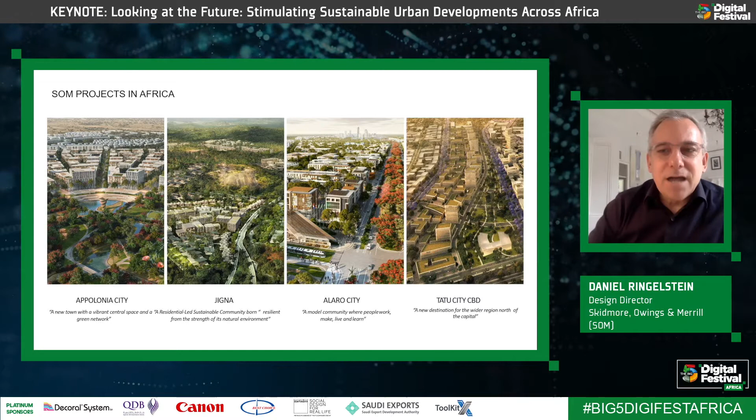Just to give you a sense of scale, these are all potentially greenfield projects on the outskirts of these cities, about 800 to 1,000 hectares in size — similar to, if you know, central London, the city of London, the square mile, as it's known.

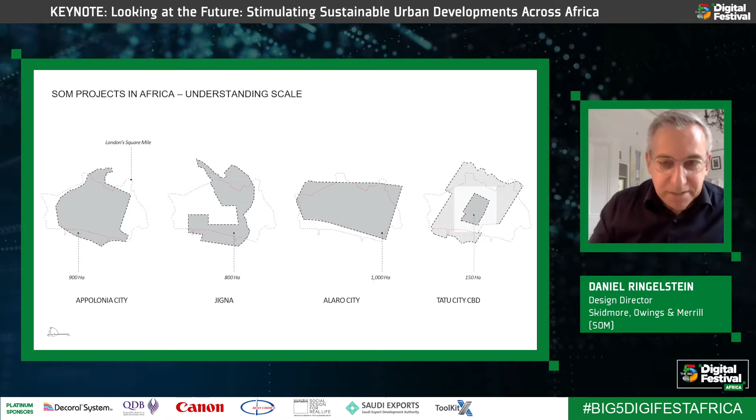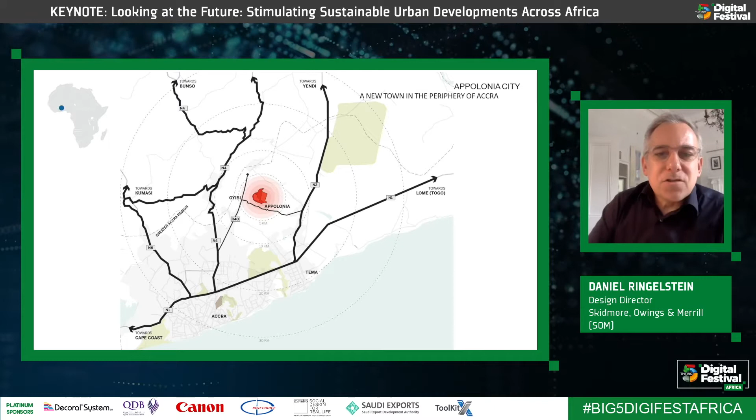The first project here is in Ghana, on the outskirts of the city. Again, a new community, primarily housing with a mixed-use core and also some light industrial land located to the north of Accra, on the outskirts of the city.

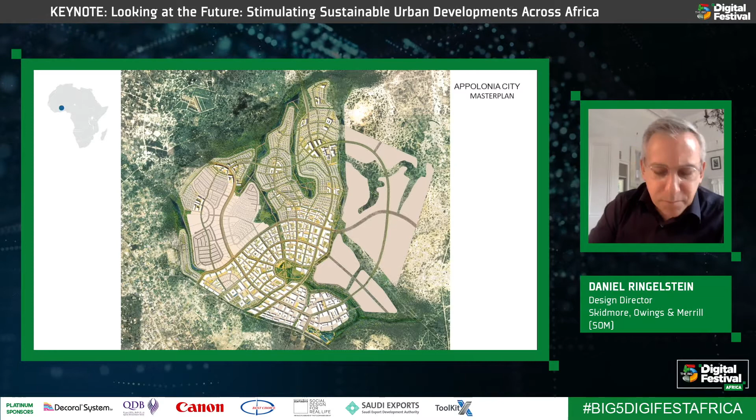As in most of these projects, we are engaging with a very interesting natural rural landscape in many cases, so we try to be shepherds of the local site and understand the natural systems that can help frame our projects. These really end up shaping the plan from a 2-dimensional point of view, but also understanding how the landscape can be harnessed to create value in a more 3-dimensional way, creating places for people to come together.

We're using these greenway corridors not only to manage water, but also to create linear park spaces that bring people together in these new places. We have to create a 'there,' particularly in these out-of-city-center projects, so we use these green spaces as a way to build community.

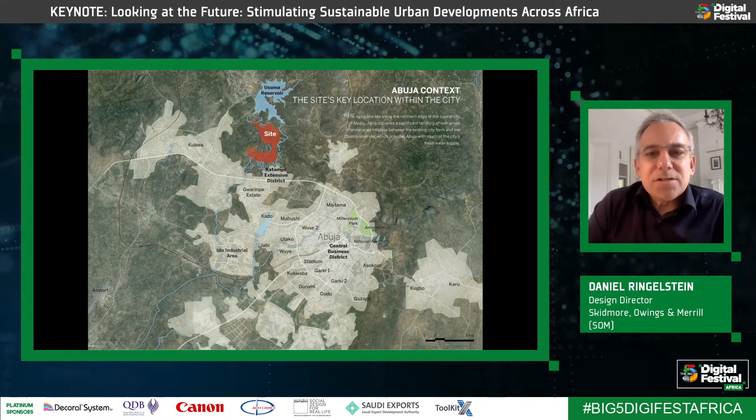The second project is in Abuja, the capital city of Nigeria, again outside the city center in a much more sensitive landscape environment. This is an expansion of the city to the north, and a pretty amazing site that's really within the foothills — not of the mountains, but with incredible topography surrounding the site.

This site is really one of tremendous environmental interest, with granite domes created in prehistoric times that are revealed to us, tremendous valleys and natural landscapes. Some of this land is being grazed with pastures, but most of it is native, untouched land.

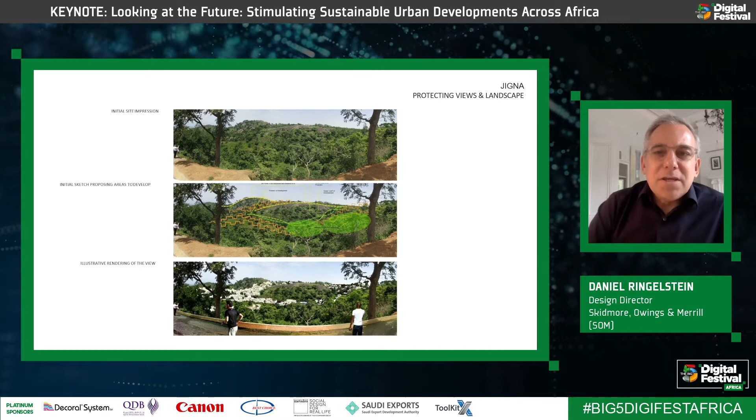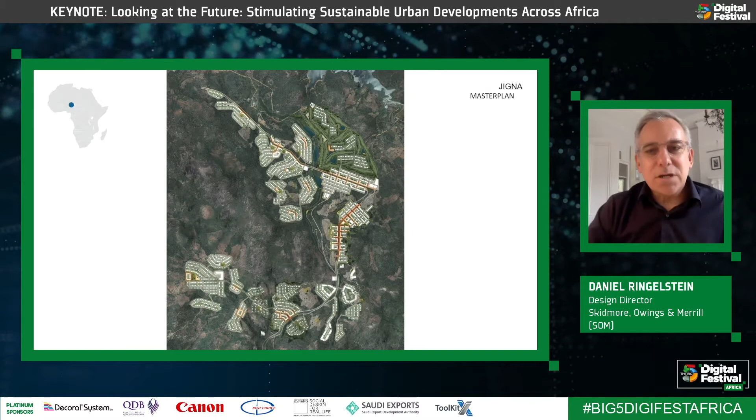In this case, we really wanted to plan in a very sensitive way, from a bottom-up point of view — asking where you would want to find development within these incredible valleys and peaks, rather than a top-down approach. So the plan isn't really a formal top-down idea at all; it's the result of working with the land to understand appropriate places to build, and where not to build.

And this is the result: a series of communities that find their way to coalesce within little neighborhoods around the city center. Each one has a direct connection with the natural landscape and the water courses that flow through it, and we try to make sure we're protecting these ecosystems.

Even when we design an individual neighborhood, we work with the topography — whether cross slopes or longitudinal slopes — to find streets and neighborhood spaces that necklace themselves into this very intriguing natural environment.

The third project is called Alaro City, again in Nigeria, on the outskirts of Lagos. This project really helps support the future growth of Lagos, which is expanding tremendously as the major cosmopolitan city of the country on the coast.

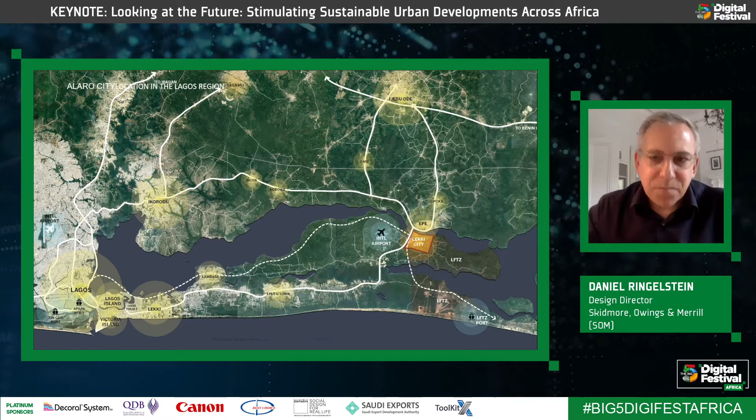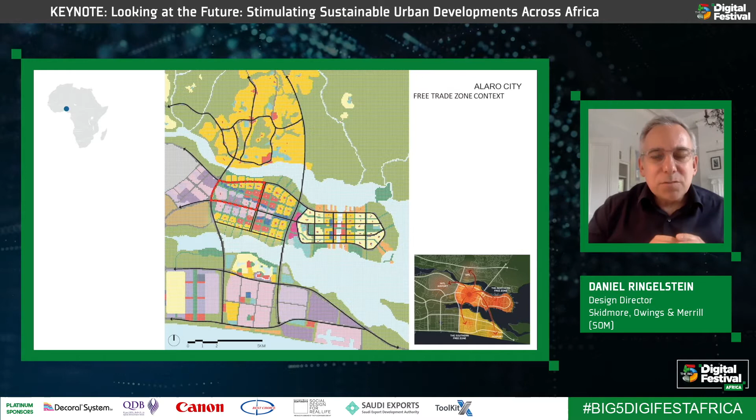And our project really we see as this new city center. So our project is the boundary shown in red here on the left. But we wanted to also make sure before we began to master plan this, have a wider vision for the wider area, which really had not yet been developed at any rigor.

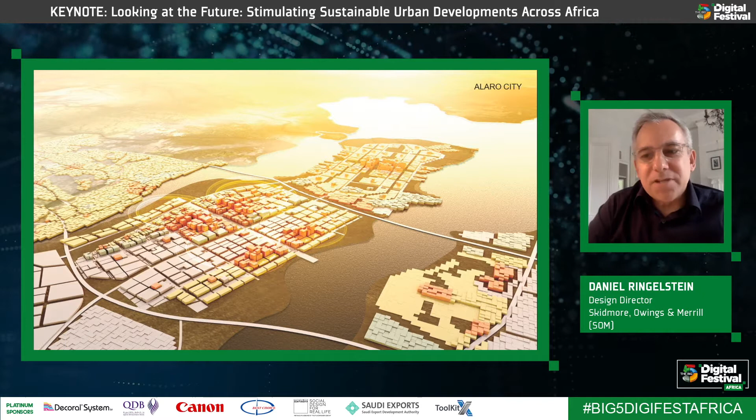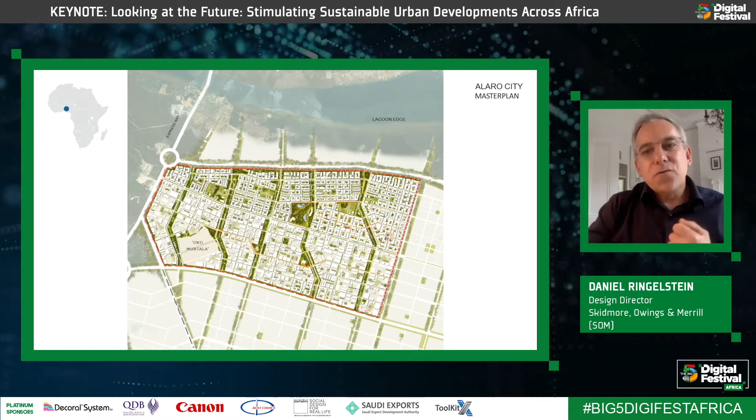So we were able to talk with the city government to understand the potential to build up a piece of a much larger plan that's coordinated at a larger scale. Again, here we have very sensitive natural environments, in this case, very low-lying flat land with potential for risk of sea level rise and flooding. So the natural courses of the green spaces that were there today really drove through and sort of broke apart the simple grid of the city that we developed here.

Again, the basic economic driver of this project is the industrial zone. So we were also thinking about what is the future of contemporary modern industry to also create local jobs. Obviously some of it's sort of harder space, industrial space, but also some of it is going to be in the future cleaner industrial space where the making of things is done in a much quieter and much more conducive environment for people.

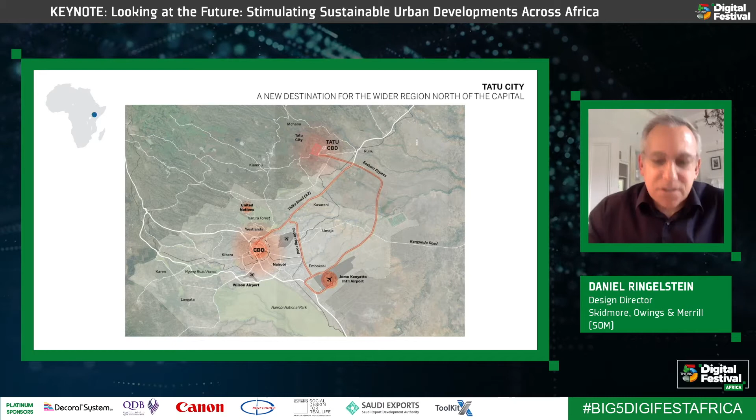And the fourth project we've been working on is in Nairobi, called Tatu City, located to the north of the city center. Again, this is more in an affluent area, but again on the outskirts of urbanization. It was a former coffee plantation, so there are obviously man-made interventions that happened here, but there's still a lot of tremendous assets in terms of the natural landscape to plan the city around.

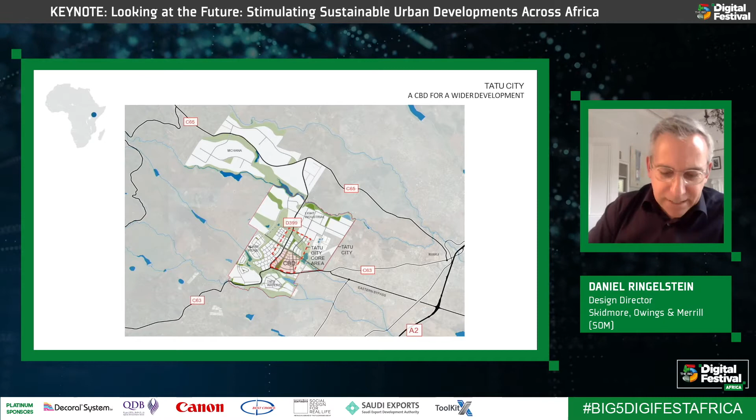So this project is now up to 2,000 hectares, and we were planning the central CBD, and we've also been looking at some of the neighborhoods around the CBD. This project was really focusing on how to deliver a mixed-use core over the long term that could be a bit more dense to provide really a new civic center for this part of greater Nairobi.

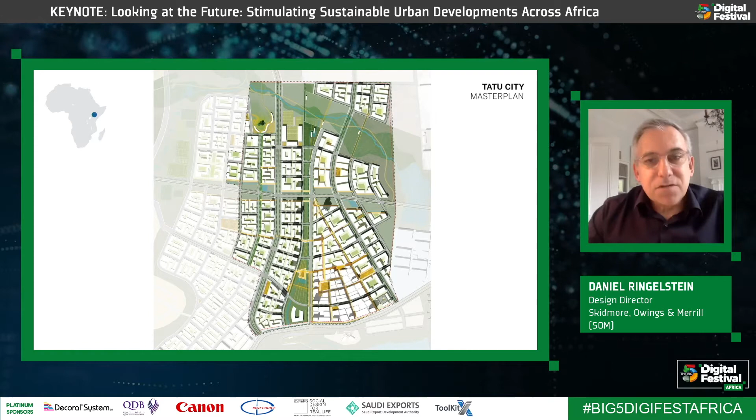And again, I'll focus on natural open space, but also this core of the city which had an intensive retail program. We wanted to make it feel much more outdoor and engaging in this incredible climate. It has the same climate profile as Santa Monica, California, in terms of access to sun and cool breezes.

So we tried to embrace that to form a new model of retail, and also find elements of the landscape which are pretty phenomenal in terms of this, for example, a mugumo tree, which is a ceremonial tree, incredible scale and size, to make that a feature in one of the neighborhood parks.

So really that's just an overview of the projects. Now I'll just go through some of the common themes that drive our work across all these projects.

Obviously, Sub-Saharan Africa, like many emerging markets around the world, has a lot of issues to deal with. Previous to working in Africa, we were doing a lot of work in Southeast Asia, and it's quite uncanny how those challenges are parallel. It's really about infrastructure, how to deal with rapid urbanization, what is appropriate density, how to provide a wide range of affordable housing, how to deal with climate change, and in this case, a heck of a lot of stormwater that's coming onto these sites, but also really building community, addressing the very colorful cultures there in each of these different places, and also building talent.

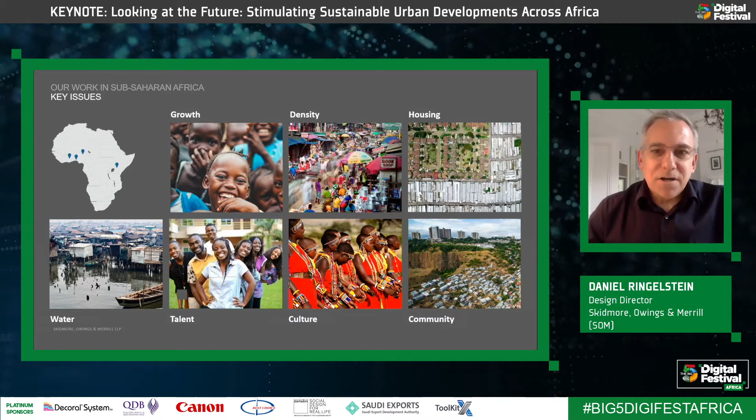The population curve of these countries is such that the majority of the population is a very young age, 20 to 27 years old on average. So this really is about building the future.

So this next section of the presentation is organized in these different themes, and I'll walk you through each one and how they kind of led our work in all the projects. The first one's about really working with the land.

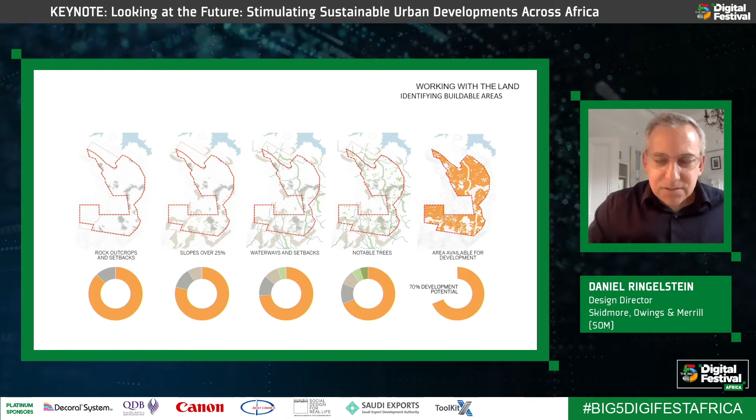As I said earlier in this project in Abuja, we had to really undertake a three-dimensional analysis of the constraints that we felt added value to the place. So the watercourses, the granite domes, the incredible peaks and these valleys, and then come up with a residual plan for where you could build.

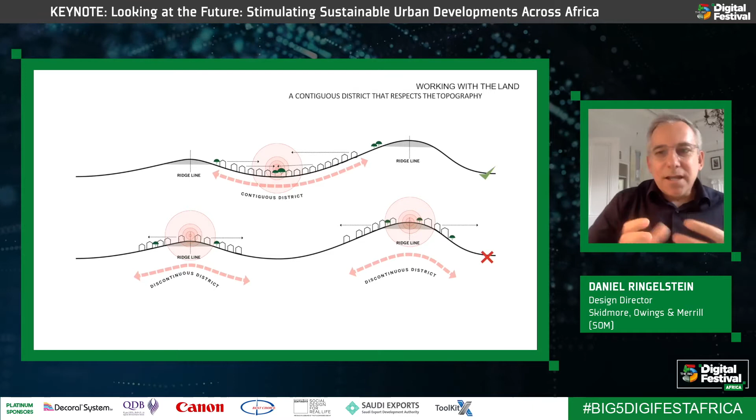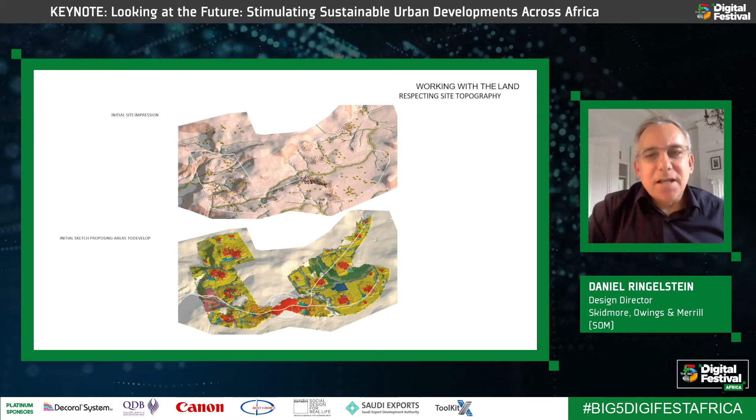So the strategy here was to build in the valleys, not on the peaks. That way, development could nestle into these lower areas and be hidden from view from many different places. For this project, we really had to understand the three-dimensional topography in detail. So we built an intense three-dimensional terrain model, which helped us zoom into different valleys and peaks to understand where best to focus development, and guide the plan in a much more responsible way.

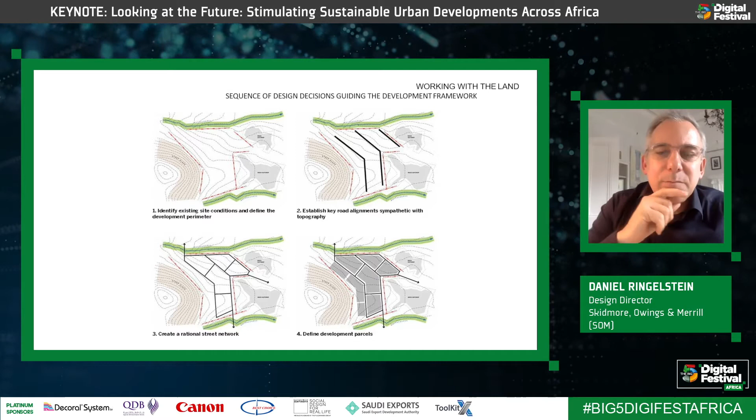Then when we got to the neighborhood scale, we had to continue to think about the topography and organize streets and parcels with it, so there was a least intrusive way of building these neighborhoods within the existing landscape.

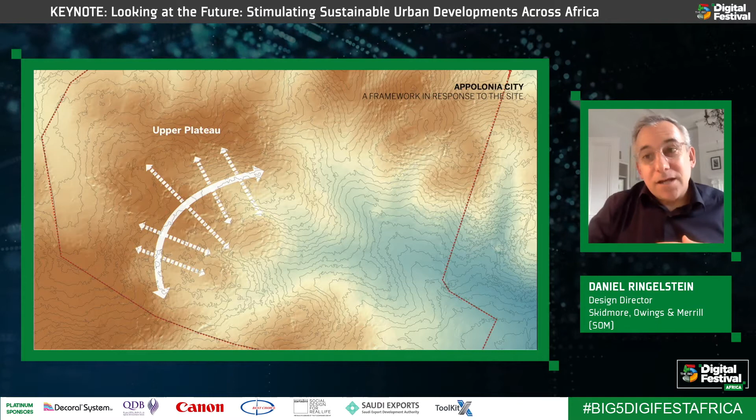In a similar way, the project in Accra, Appolonia - the topography here wasn't as acute as in Abuja, but there was still tremendous value in understanding where the peaks and valleys were. In this case, we actually encouraged the client to readjust the previous plan to put the heart of the city up on top of the plateau, with great views down into the lower valleys.

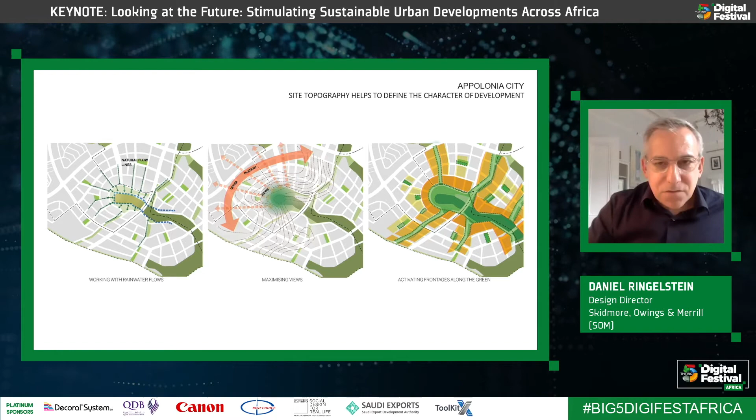It also helped manage rainwater, channeling it from the neighborhoods into that greenway. The whole central focus of the project turned into this crescent shape of the downtown area - the town center of the project that gives it its identity. Again, it's driven directly by the nature of the site that's there today.

Another principle we've been employing, since these are all sustainable mixed-use communities, is to provide a series of different centers that work at different levels. So not only are we designing the town center at the heart of these communities, we're also designing neighborhood centers that find their way throughout the rest of the sites.

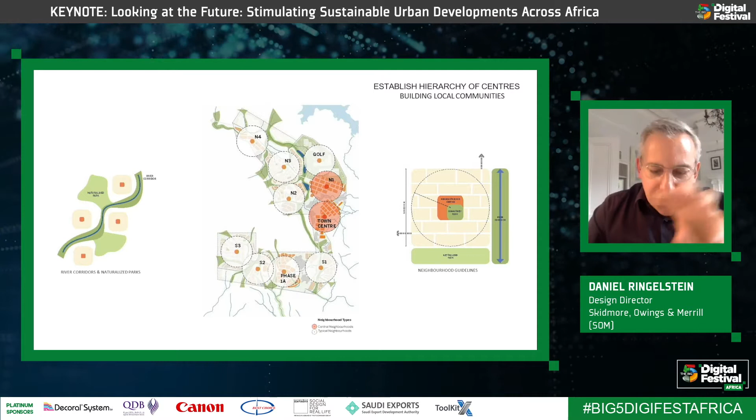Each neighborhood is based on a 3 to 5 minute walk, at the center of which you'd have a community amenity, a green space, a playground, etc., so you don't have to walk all the way into the center. And if the neighborhood center has retail and workplace, we're not traveling as much into the main city center either - it helps keep people local.

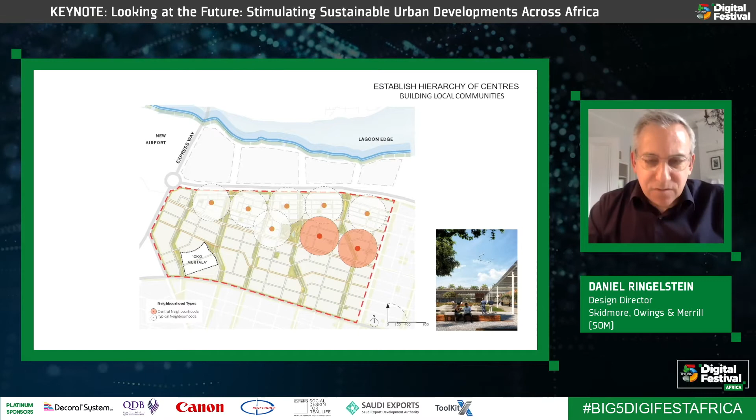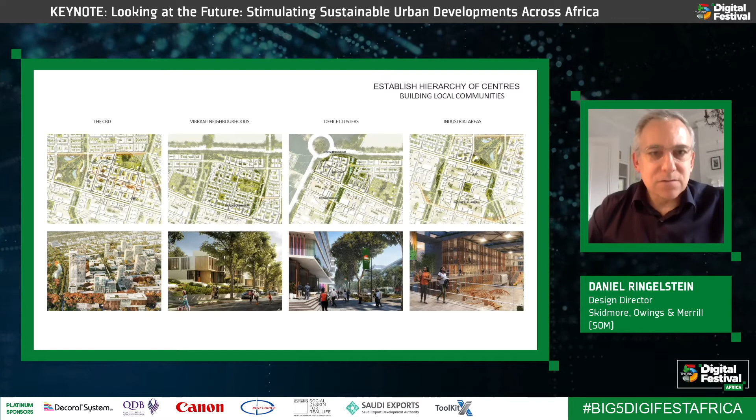Each of the projects drives forward that principle of centers. Here are some examples of how that plays out in different clusters of development. Even though each neighborhood may have a different use focus, each one has a clear civic center and open space, and community program in those neighborhoods.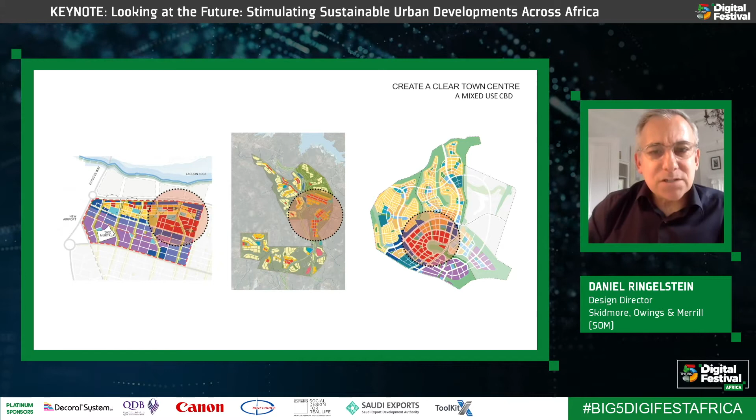Within that, each city we're developing has a clear town center. Here we've revved up the urbanism, the density, and the level of mixity, which I think is really important for these suburban kinds of developments. I think the most successful ones we're seeing in the Western world function along these lines, and many of the more traditional rail suburbs or memorable places outside of city centers in the Western world carry this same principle.

So here at Tatu City, it was about raising the density, providing for a longer-term vision that might even reach a much higher density, with intensive retail, mixed-use hospitality, and housing in and on top of the retail - instead of it being separate zones like it traditionally is in these places - to create a 'there there'.

In Abuja, the town center was much smaller - almost what I'd call a village center. It's a main street, a few blocks long, with some housing at a higher density alongside. The environment was more sensitive, so the level of intensity was lower, but again, still creating that urbanity at a certain level.

We also want to make sure there's diversity, and that we get away from the cookie-cutter approach to development that we sometimes see in these out-of-city environments - so a variety of different development typologies.

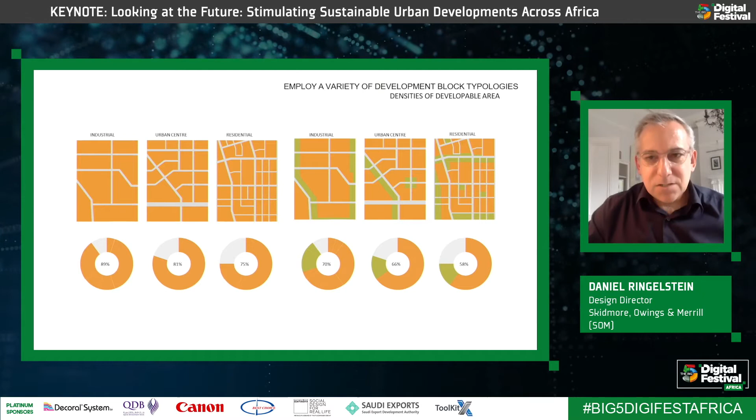What's great about the Rendeavor mix, in terms of developer program, is this great mix of workplace, living, and other commercial activities. That drives urban form and planning in many different ways. But we also make sure we're ensuring the amount of green space that each of these places and uses need, to survive in a more sustainable way.

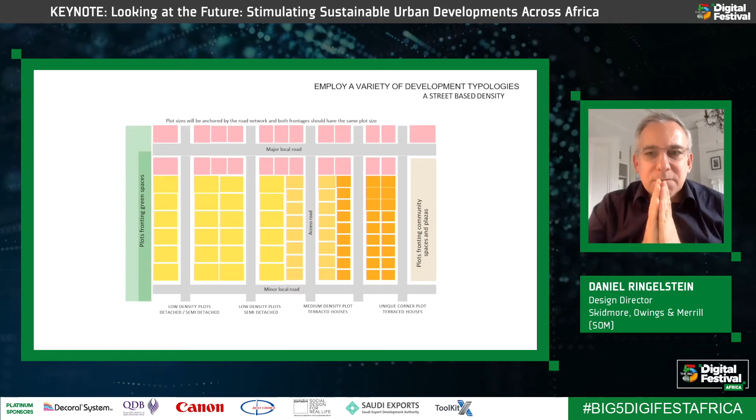Within housing as well, we're working with clients and their marketing teams that have a very specific mix of typologies of housing that they're selling, whether single family, townhouses, or flatted accommodation, and really creating the street as the thing that identifies the market, not the product. It's a placemaking approach to organizing where the different development products are allocated in a neighborhood, which plays out at larger neighborhood scales to create places. So you have a center of the community that's clearly defined by density or use, and the streets that fan out from there have a similar character.

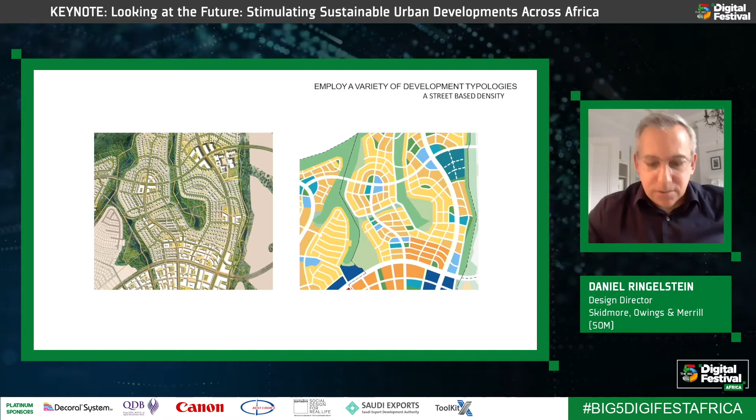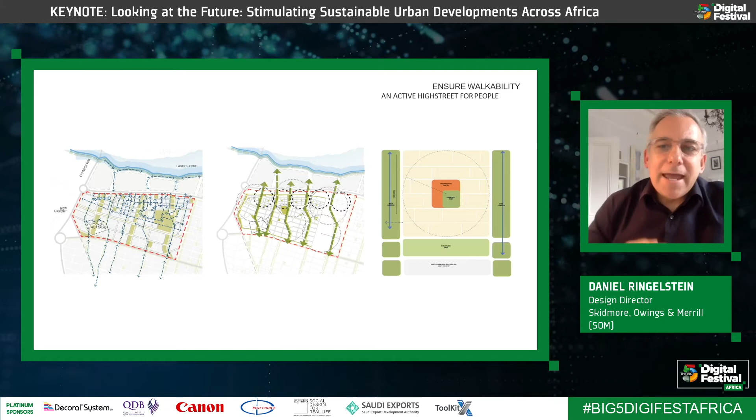All of our projects are promoting walkability. That's one of the great things about sub-Saharan Africa, that people are walking everywhere. So there's already a cultural acceptance of walking, even in tough climatic conditions, and we just want to make those environments better - making sure there's a network of walkable streets, a network of cycle lanes, and attractive amenities to reach within a short distance, all supporting this principle.

The urban form also needs to support pedestrian activity so these streets feel comfortable. We're not talking about high-rise development or streets for cars, but streets for people, with a building fabric that shapes these spaces at a very comfortable scale.

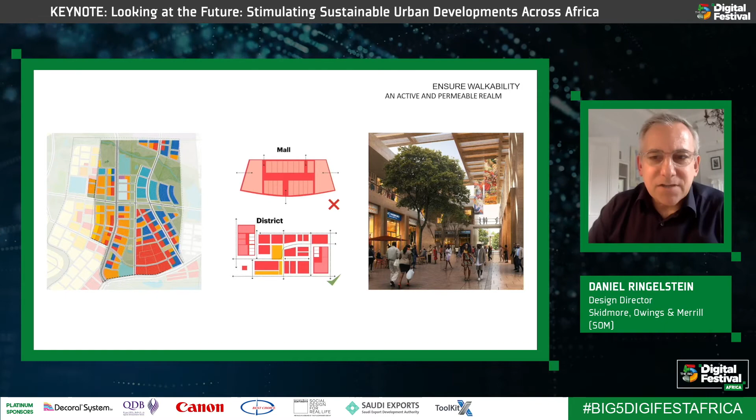When we get to some big projects, we also try to challenge the sense of a retail mall, which tends to be the first go-to solution for shopping. We're promoting much more of a district experience, multiple routes, a more urban sense of discovery and excitement, which I think is the future of retail versus the enclosed shopping mall. Everything we're doing tries to promote active ground floor frontage, space for people, shading, landscape, and variety and diversity in the architecture.

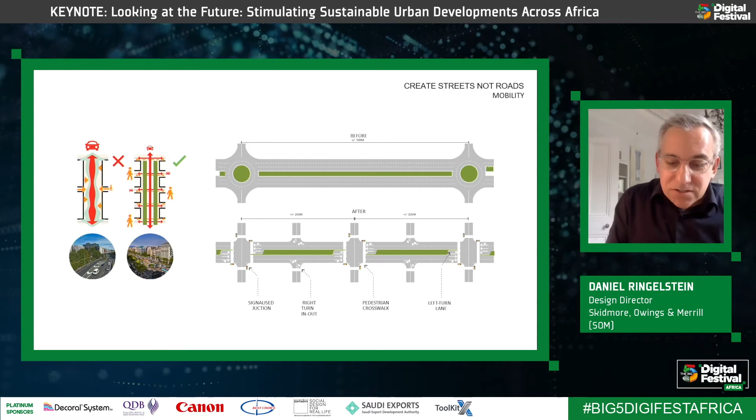When we come to a project, often many of the project roads have already been designed, so we have to retrofit these. There's always a sense that people think we have to widen streets and create through traffic and efficient traffic, combating congestion - but we think congestion is actually a good thing from an urbanity point of view. So we try to create streets versus major roadways, so people have just as much priority as the automobile.

This is about developing good boulevards and avenues. We talk about these things in that language versus a street, road, roadway, or highway. Landscape plays a key role - we're champions of green streets because they provide shade and efficient places for people to cross from one side of the street to another.

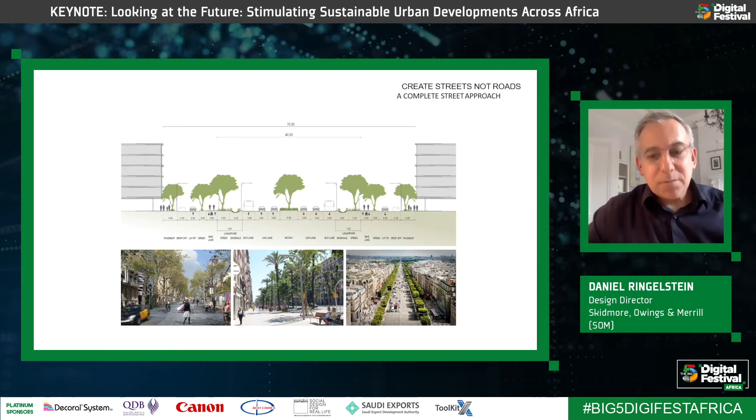All of our projects have a series of street sections that describe the full hierarchy from the largest street right-of-way down to a neighborhood lane, giving guidance to the infrastructure designers as to what the intentions should be, and helping traffic planners understand how to manage flows and turning movements at intersections.

Sometimes we come to the game where the road has already been built, and we can't change its system, but we can change its character. In this project in Appolonia, we've encouraged the client to think about development that frames these streets - the boulevard isn't just for getting through the city, it's an address, a great address with high value for commercial or residential real estate, and a great place for people to come, mitigating fast, free-flowing traffic into more urban avenues and boulevards, even in a retrofit.

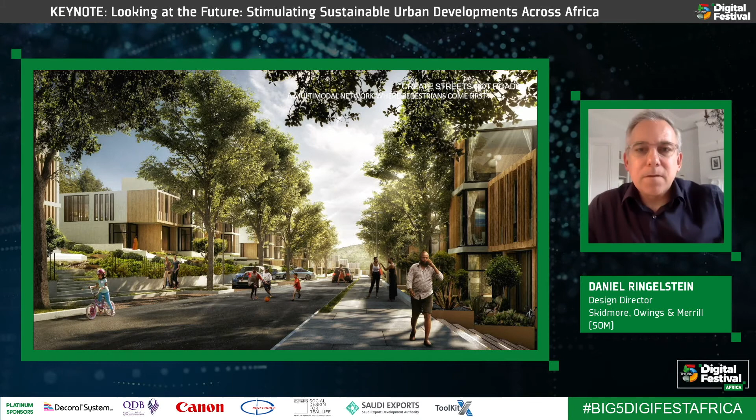The principle of creating great streets extends to neighborhoods, where in some places these are streets where children play. They should be safe places alongside movement of vehicles, making sure there's proper distance and space for that kind of informal activity to take place.

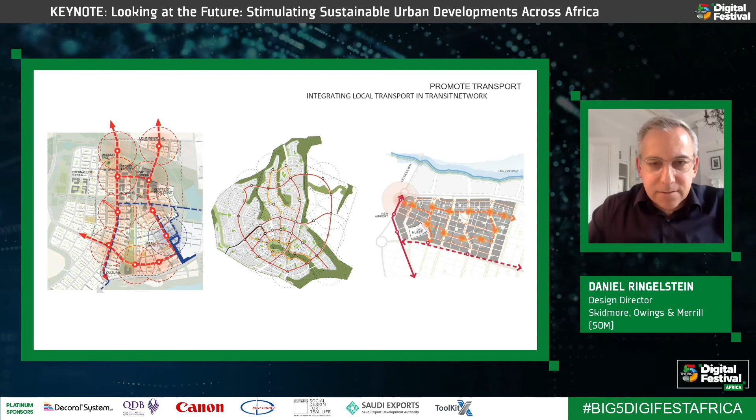Besides walkability and creating streets, we're also promoting public transport. There's already great local use of informal transit and mass transit, which I think is one of the key critical elements as these cities intensify and continue to grow. What we've promoted in our projects is extending that system into our communities so there's a clear network and hierarchy of multiple kinds of formal and informal transit that can structure these plans, with stops and corridors interwoven within urban activity.

So we've organized bus corridors, cycle corridors, and incorporated a great urban avenue, just like we see in most of our Western cities or more developed cities.

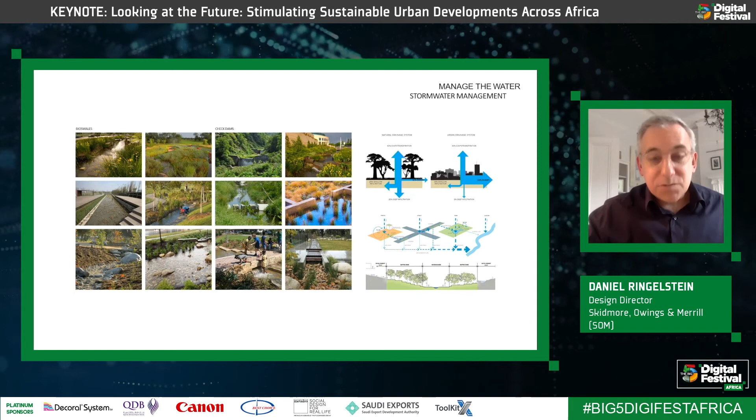Another key component of our thinking is the landscape and the management of water. We're not just moving water, we're trying to use it as a value add. We've been able to convince this client to get away from putting everything in a pipe and to actually daylight these systems.

Yes, there's always an issue of stagnant water and clean water issues, but as these communities grow over time, as we've seen in the developed world, these management systems are easy to arrive at, and they can become wonderful spaces that animate parkland and linear garden space.

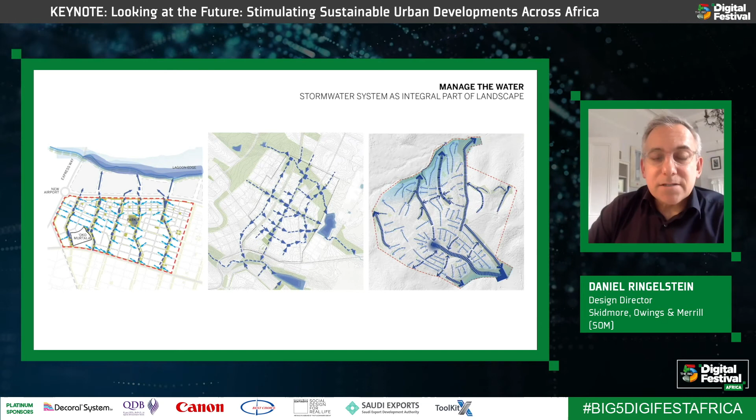So each of our projects has a clear stormwater strategy in terms of the flow of water and how that feeds into the natural landscape, and can recharge local water bodies that would otherwise have a negative impact if everything went into pipes and drains.

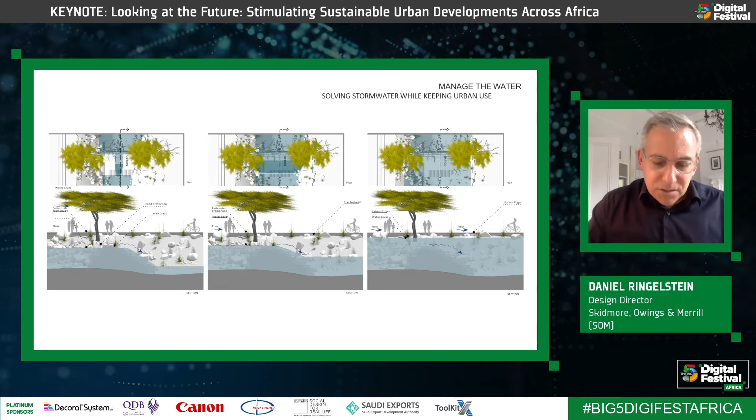The landscape is a performative landscape, designed so it can handle the big moments, but also still have a trickle of water when it's not raining, so the movement of water continues. These are the strategies we've been employing, and we're going to start seeing the first constructed elements of this very soon.

The next theme is really about building equitable communities, about placemaking, bringing people together, whether it be a market space, a market square, or a school playground. These are important aspects that we feed into the community that structure these plans.

This client is really forward thinking in terms of bringing in partnerships with school developers and school entities, and they're building schools first before they build housing. They understand that to build a new community, you have to create a place for families to be attracted to come to, and then the schools and other civic components are required.

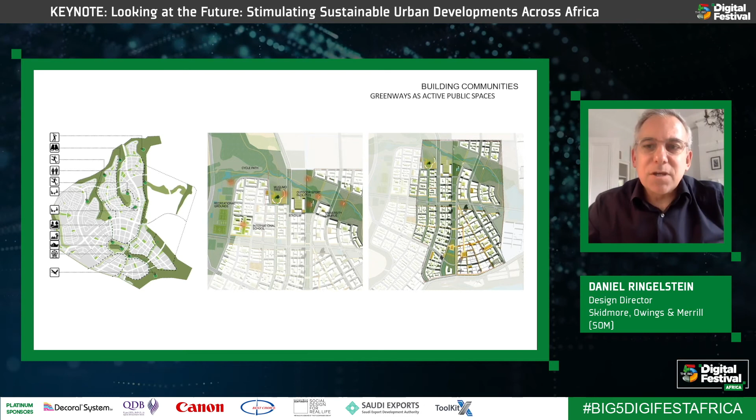So the hospitals, the police and fire facilities all have to be provided at the same time. That's part of the planning as well.

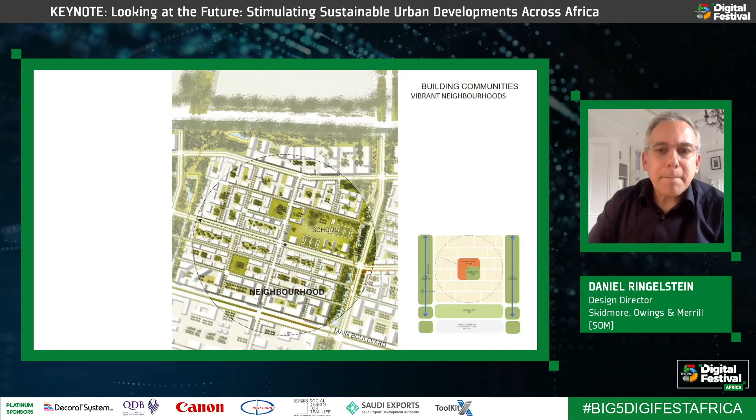Each neighborhood, each phase, usually has a school component as well, and that component is developed over time, one by one, so a neighborhood is completed as they go forward to the next neighborhood.

Some of the housing is at higher density scale, so flatted housing, and some of the housing is at a smaller scale, sort of individual villas.

We've been working with the client to set out a series of guidelines that push the aspirations in terms of contemporary design in housing, but using local and sustainable materials to reflect the character of the place in these various locations.

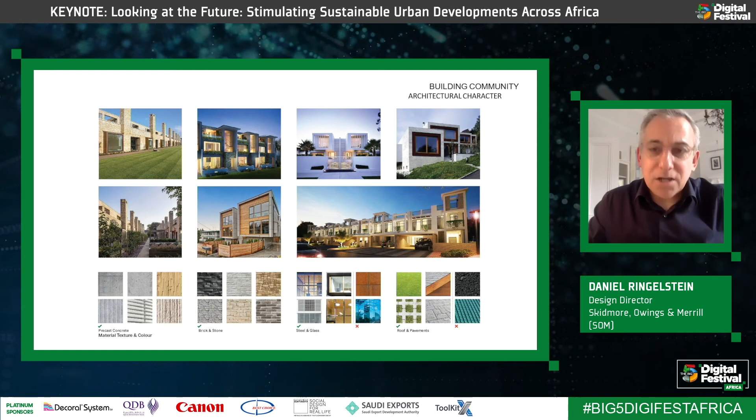We have a lot to learn. We are not from Africa, and we really look to the teams on the client side that are from these places. They have a great collection of local talent on the developer side helping us understand what it's like to be in these places, what's important to the people there. And it's very different from one country to the other.

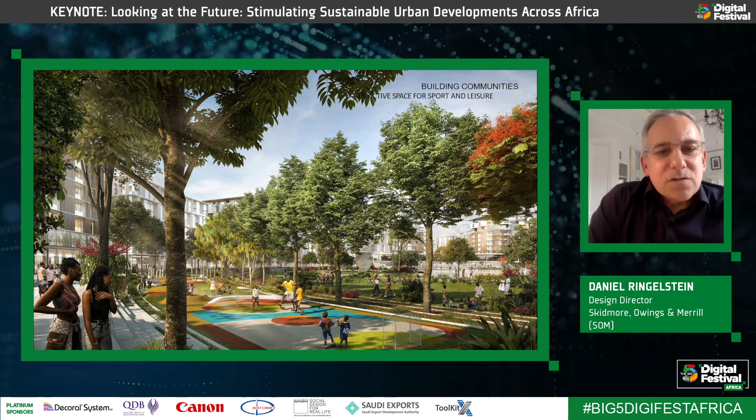So we're trying to integrate, at least in spirit, that sort of vibrancy into our work, celebrating art, celebrating colorful moments that can come into civic life, and that can infuse the development of the public realm and even the architecture of buildings, in a very contemporary designed way.

That can find its way into not just horizontal public space, but also the vertical realm, whether it be artistic insertions or the facades of buildings, finding moments to celebrate that color and delight. That's being fed into our guidelines for maybe the higher density projects or commercial projects as well as residential.

So I think with that, I will wrap this up. I'm very pleased to have been able to share our experience, and our delight to have been invited to bring our international expertise, but apply it in a very local and sustainable way in this new context that we're learning more and more about every day.

And we really see a bright future in cultures and peoples who are really looking to push forward, to innovate, to do the right thing, and to really help define their urban futures going forward. Thank you very much.